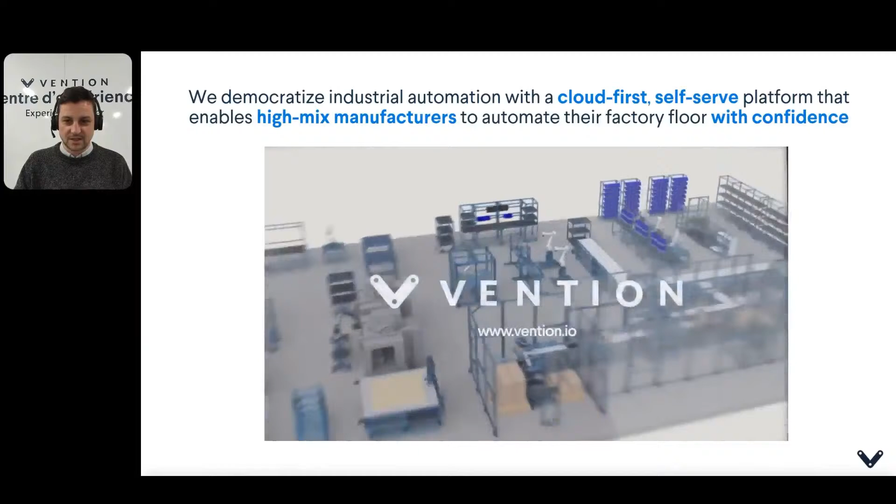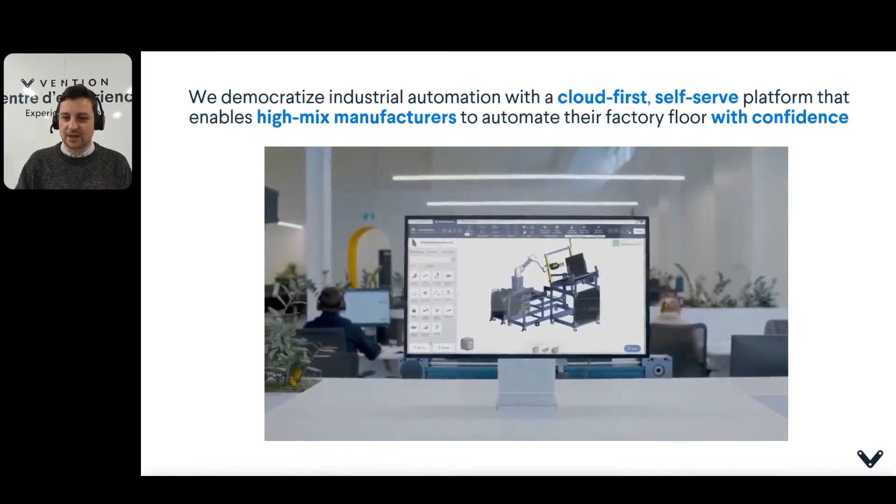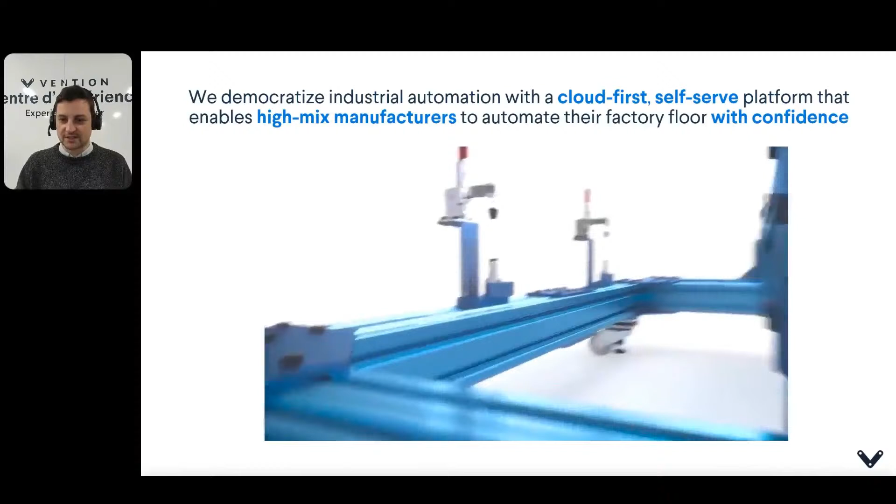First off, to introduce Vention and our goal, our mission here at Vention is to democratize industrial automation. To do so, we have built a self-serve platform for high-mix manufacturers. By self-serve, we mean that our users, such as manufacturing engineers and plant operators, can design, automate, order, and deploy by themselves in an autonomous fashion. This allows high-mix manufacturers to have more access to automation, as they historically could not easily afford to launch industrial automation projects as a result of their smaller production volume and high mix of parts.

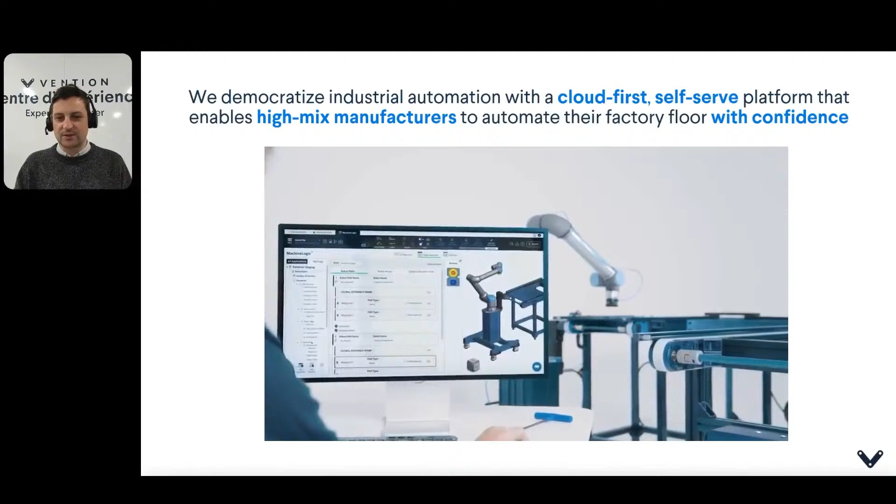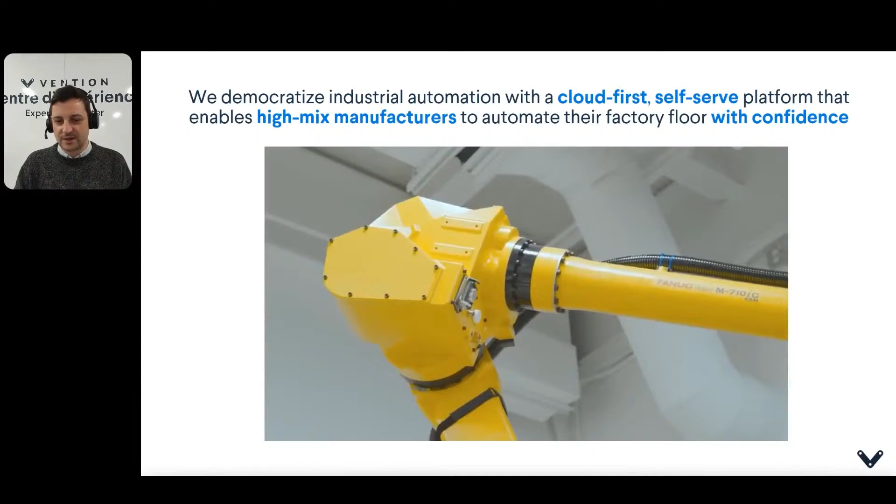One thing I like to emphasize here in our mission statement is 'with confidence.' Since Vention offers cloud-based design and automation tools, this means that users can self-design, self-program, and simulate fully in the cloud before they commit to an investment.

A few facts about Vention. We were founded in 2016 and are now 7 years old, nearing 8. We have 3 offices: one in Montreal, one in Berlin, and one in Boston. Our parts ship from 2 distribution centers, one in Montreal and one in Berlin. We're privileged to serve over 4,000 clients in North America and Europe that span over 25 different industries. Vention has thus far provided more than 16,000 machines in the field and delivers approximately over 200 robot arms per year, both collaborative and industrial.

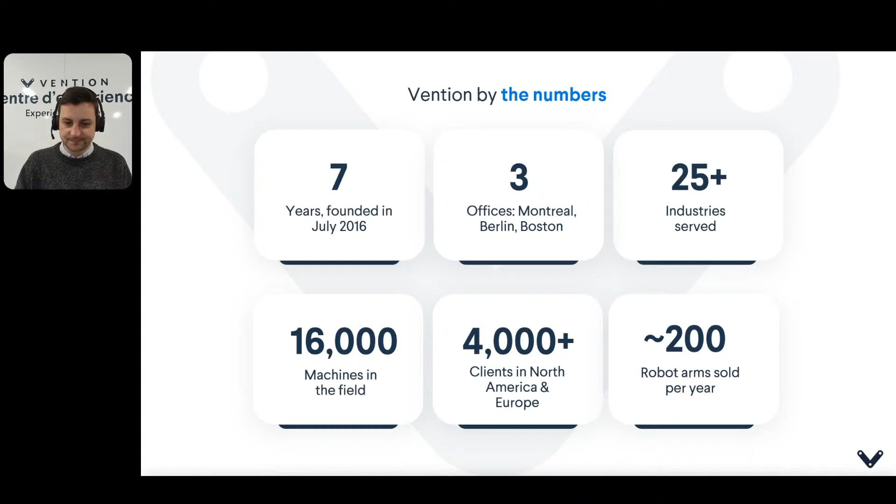With the introduction out of the way, now let's get started with an introduction to automation, but also how to get started.

First, a little background on automation in general. High volume manufacturing facilities, like those for cars and consumer electronics, have been automated for decades. However, the vast majority of manufacturing plants in North America, around 80%, are still operated by manual labor. And yet these manufacturers often face the same production cost pressures and labor shortages as their high volume counterparts. Industrial automation is often the best solution, although it can be a daunting one for new manufacturers or first-time automation practitioners. New adopters may find that deployment is costly, production delays are frequent, and it's hard to balance safety requirements with efficiencies. Nevertheless, the need for automation continues to grow, and manufacturers will not be able to avoid adoption for much longer if they wish to remain competitive in their segment.

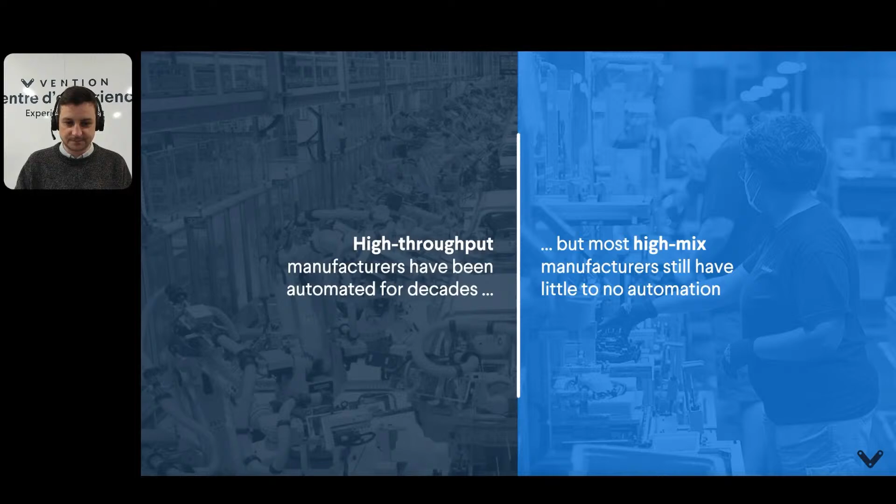So let's take the example of a $500,000 project. If you unpack that project, half the cost will be for the technology, usually coming from established manufacturers of industrial automation providers. The other half usually goes to the system integrators or the engineering work that is needed to design, program, and eventually deploy those systems.

What Vention does through a self-serve platform is eliminate the second half. You become the system integrator of your own automation solution. This shrinks the project cost and by default enables manufacturers to automate profitably and autonomously. With the technology provided by Vention, we end up in a world where folks that used to operate the manufacturing floor are becoming the folks that will now design and automate our manufacturing floor.

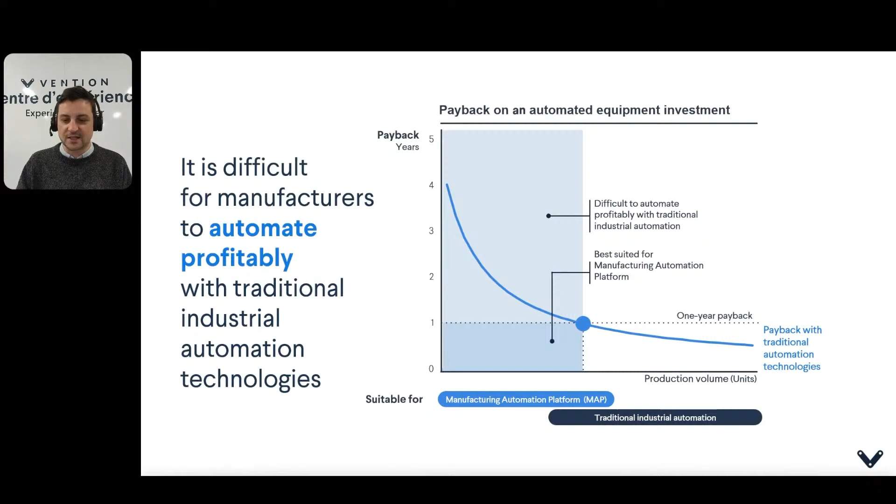Now you know the financial framework for evaluating automation projects, but how do you set yourself up for success? What process should you follow to ensure you're successful on your automation journey?

We've discussed the importance of ROI in the previous section, but there are other compelling reasons to move toward automation. In addition to labor cost savings, maybe you are facing labor shortage issues, or maybe you are looking to solve quality issues, or you have workers exposed to risky jobs, or what we categorize as dirty, dull, dangerous jobs.

So the first step to successfully automating is to establish a clear objective. Here are the top 4 reasons that we've seen customers wishing to automate.

First one is to realize cost saving. This usually means reducing labor and other recurring operation costs. Value creation will come from comparing existing recurring costs to the current operation, plus adding the project's non-recurring cost, and then comparing that with the reduced recurring cost realized once the automation project has been achieved.

Another reason may be to improve product or process quality. Savings here can be realized through defect and scrap reduction, or by reducing dependency on quality inspectors to inspect and validate the output of a manual process. As automation is repeatable, process can now be certified and inspection requirements can be relaxed. Automation also leads toward process optimization, reducing the quantity of consumables required to achieve the desired quality output.

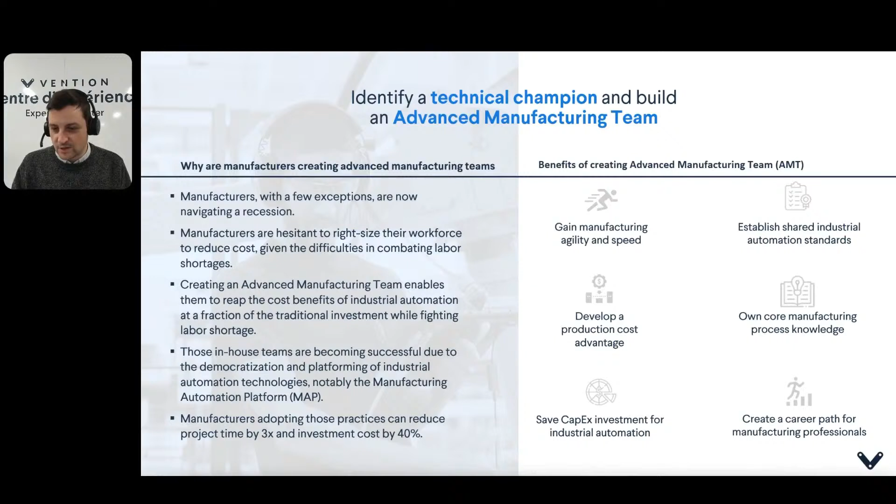The technical champion will share their deep technical knowledge within the advanced manufacturing team. They'll establish production guidelines with machine operators, establish maintenance schedules with maintenance personnel, encourage problem-solving tactics amongst all collaborators, and in the case of productized application, or if doing a turnkey project with Vention, they will also establish the requirements for the automated equipment by owning the completion of the FAT and SAT checklist. These acceptance tests are both essential documents to ensure a successful automation project in case of turnkey deployment.

The second step is to build the advanced manufacturing team. With your technical champion in place, it's time to build an advanced manufacturing team. Guided by the technical champion, this team is built to select and drive industrial automation initiatives for the company, regrouping expertise in process requirements, mechanical design, industrial control, and robotics.

This team develops deep process knowledge to deploy self-designed automated solutions in-house rather than relying on external engineering services firms to complete projects. An advanced manufacturing team is a new way for manufacturers to manage their end-to-end automation projects internally, rather than relying on multiple vendors, which typically increases the price of a project and extends the timeline.

The last step is to gain support from the top down. The technical champion must effectively pitch the project to the management to secure the necessary funding, resources, and access to the resources. Starting with a well-scoped project goes a long way when building expertise, ensuring project success, and increasing the chances of obtaining approval from management on future projects.

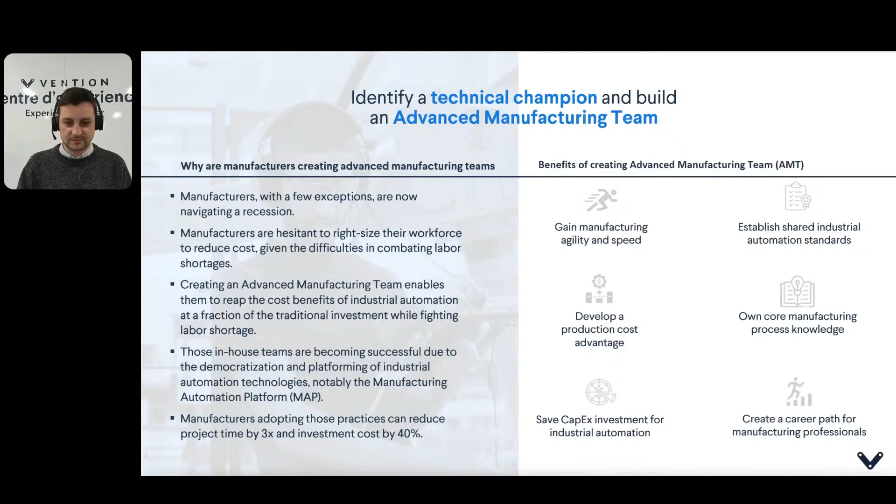With a clear goal in mind, you now face a new set of questions. Where should I begin? How? And with whom? Experts generally agree.

First-time automation practitioners should begin with a low-risk project and expand from there. Starting with a well-scoped project goes a long way when building your expertise and increasing your chance of success. With that in mind, make sure the ROI or payback is not the only thing you're measuring. You want to factor in building long-lasting expertise as well.

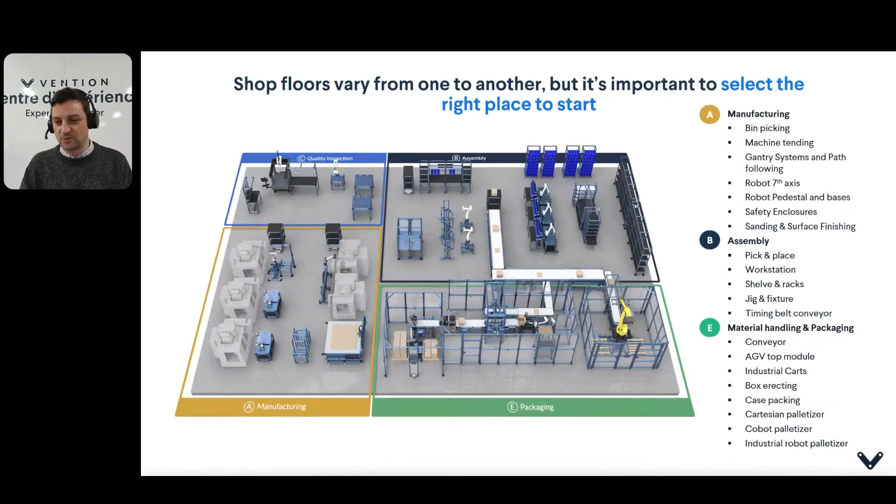That being said, selecting which process to automate consists of a balancing act of feasibility, risk management, and value stream optimization. Be mindful of automating bottleneck processes as much as possible. The last thing we want is to automate processes that result in an increased work-in-progress volume while maintaining the same total throughput as before.

Part of the process of selecting your first project includes evaluating the risks involved with adopting automation and how best to mitigate them and incorporate this information into your strategy. This can be largely broken down into two categories: technology and process risks.

Process risk is the ability for the chosen technology to repeatedly operate at desired performance when process input varies significantly from one unit to the next due to manufacturing tolerances and other sources of variability. Technology risk, on the other hand, can be interpreted as the level of uncertainty involved in the successful implementation of novel technologies in your manufacturing operations.

The TRL scale, or Technology Readiness Level scale, can inform on the maturity level of selected manufacturing technology, but one should also be mindful of the available skill set within their organization. This is where it can be relevant to discuss upskilling the current workforce.

So first, let's discuss process risks. Process risk relates to the operation, task, or process that one is looking to automate. It's owned by the end user of the solution that is being provided. Oftentimes, it can be largely underestimated by teams with the expectation that everything can be automated all at once.

Process risk management involves focusing on the process, or SKUs, part numbers, that constitute the majority of the production, and descoping edge cases from the first automation project. The 80-20 rule applies here. It's not uncommon that 20% of a production can result in 80% of the cost. Focus rather on automating 80% of the production instead of 100%, and there's good chances of decreasing the total cost and raising the efficiency of the automation solution that you choose.

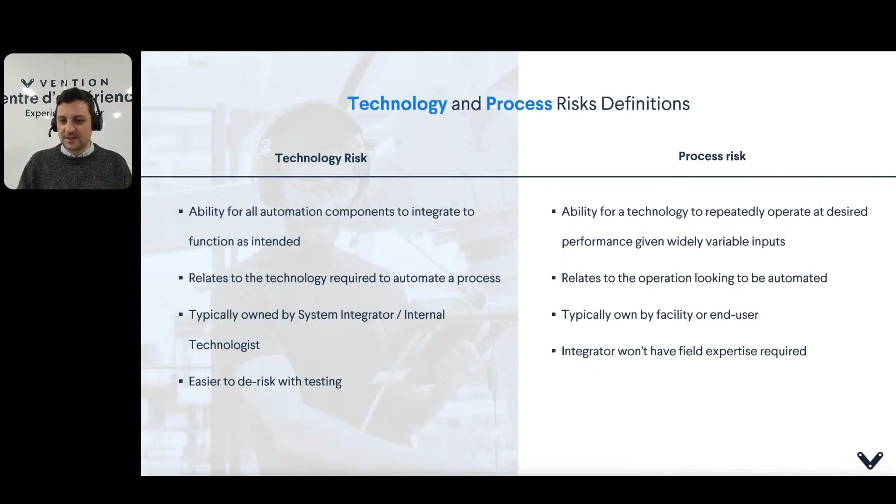Upskilling the organization's workforce can be key here. Ask yourself, do I have the capabilities to operate, troubleshoot, and maintain this type of technology autonomously, or will I require external support? High industry technology readiness does not directly translate to your organization. Set ambitious goals, but aim at raising the ceiling of your internal competencies.

So to discuss this in more detail, let's look at a robotic palletizer example to highlight what can be categorized as a process risk versus a technology risk. So the process risk is essentially managing variability induced in manufacturing cycles. The source of variability in the palletizing process can be the variability of box orientation as they're presented to the robot. This will require the solution to account for that variability of box orientation.

You may have different box sizes as well that could impact the gripper selection. Various weights of the boxes could also account for what robot or cobot you choose to automate, because the payload of the robot needs to be accounted for here. And different pallet layouts — how many process recipes do we want to support?

Technology risk is the question of, is the technology mature and is it within my organization's competencies to operate and maintain? So you can ask yourself the question, are cobots technologically mature? In this instance, yes, they are, but it can be argued that 3-axis gantries are even more robust.

So what would be the impact on process risk if we choose to go for a 3-axis gantry in relation to a robot? What are the integration requirements? What communication protocol do I use to synchronize all the processes — the conveyors, the robot, and other downstream or upstream processes? Will this equipment need to be integrated with other legacy equipment?

So do I understand how I will integrate my robot with other equipment that may already be present on my factory floor? Will I be able to operate, troubleshoot, and maintain this machine? If not, do I need to hire, upskill my workforce, or do I need to delegate some of those operations to external contributors?

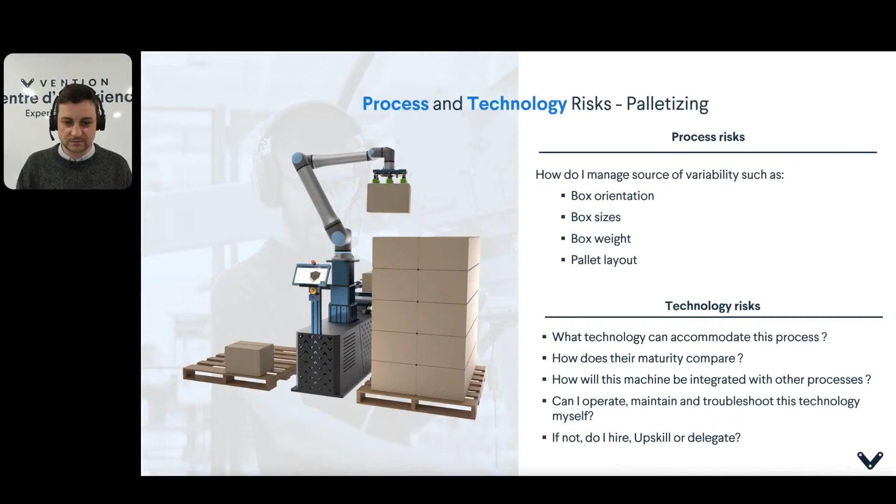As an industry, we have made significant progress in extending the process risk frontier, with breakthroughs such as mission-based programming, digital twin, tactile feedback, and synthetic training. There's a vast array of things that are possible to automate today.

Vention aims at empowering manufacturers to take control of their automation journey by helping them push the technology risk frontier. So building the design-to-deploy workflow as the centerpiece of Vention's self-serve platform, along with the productization of key robotic applications and the plug-and-play nature of all our automation hardware, all play a significant role in reducing the technology risk. Also, as manufacturers scale their automation experience and competencies, they will find that they are gradually empowered to take on more ambitious projects that have more process risk and technology risk associated with them.

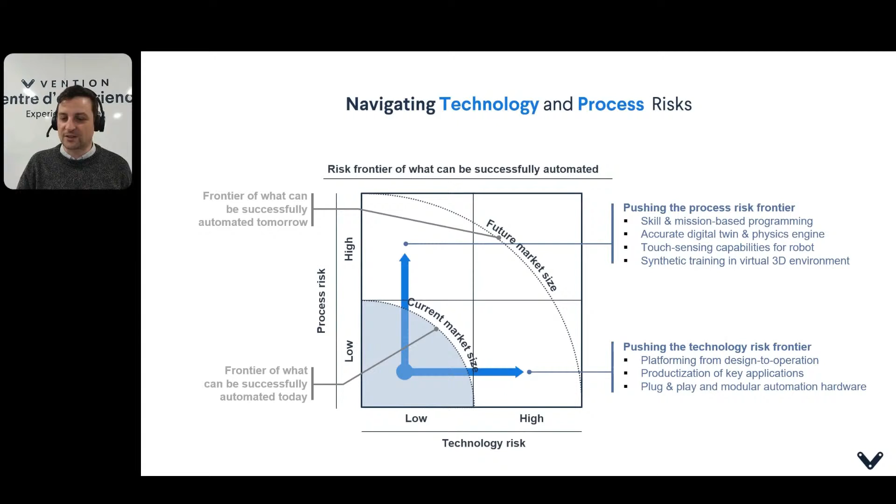This brings us full circle to Vention and our manufacturing automation platform. As said earlier, the mission of Vention is to democratize industrial automation with a self-serve platform for high-mix manufacturers.

Traditionally, industrial automation technologies are project-based, meaning manufacturers will hire an outside third party to complete the automation project from start to finish. The typical steps for project automation are depicted below.

The entire process can last months or even years and involves different experts, each possessing unique process knowledge. When issues inevitably arise, the manufacturer must call back the expert who holds that process knowledge, hoping this person has not left the company.

In product automation, the automated application or the entire manufacturing floor is created using all the same hardware component and software environment. This approach allows for easy modification and upgrade as the manufacturing floor expands or changes. This Lego-like modular plug-and-play approach ensures flexibility.

The other benefit of product automation is the comprehensive support provided. With hardware and software under a single vendor, you can access a customer success team that knows the ins and outs of the product. This team will work alongside you to troubleshoot your issues and provide resolutions, so when a similar problem arises again, you know you have the knowledge to fix it.

Speed is crucial here, and having a team of experts a phone call away rather than a drive or a flight away is invaluable to keeping your production output.

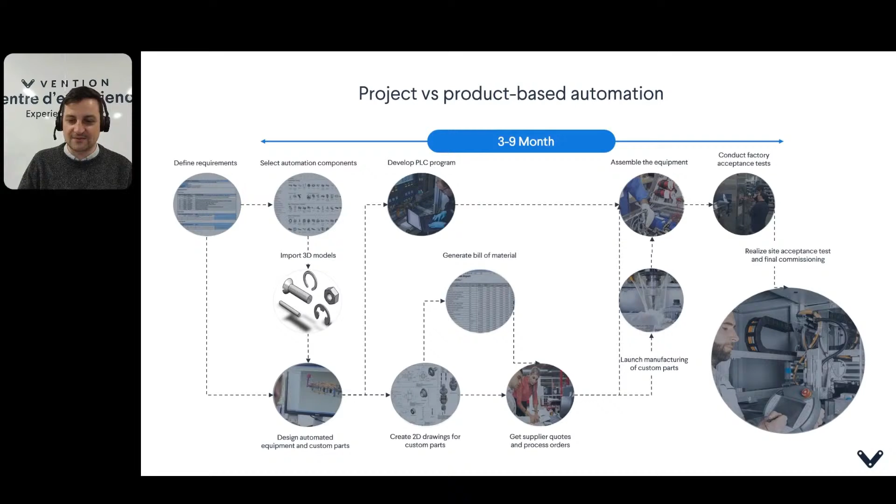So we define ourselves as MAP, the Manufacturing Automation Platform. We're based on 5 pillars, each representing a step in the automation journey. We start with design. Our users arrive on our website and fall into a software that we call Machine Builder,

where they can design with industrial Lego bricks. In that environment, we have all the geometric data and metadata of all those Lego parts: prices, weight, description. Equipped with that data set, we can do a beautiful amount of software automation that would never be possible in a traditional CAD software.

We give our users real-time pricing, assembly time, bill of material, and automatic fastener management. We can recommend the next best part for their design, fetching from a library of over 200,000 designs that our team of clients have created before.

When we bring one part to the next, we can predict how the user is trying to connect those two parts together. This whole infrastructure that we've built, leveraging the geometric and metadata, just makes the act of design significantly faster and easier. When we're done designing and we have this working prototype, it's time to automate through machine logic.

This is the automate pillar. Machine logic is our automation programming software. Within machine logic, users can program their machine either in a visual sequence editor or using a Python API.

They can also create their operator HMI and simulate the entire cycle, all from their web browser. They can simulate not only traditional automation, conveyors, pneumatics, actuators, but also robot arms. If they like what they see, they can move on and order the machine from the website.

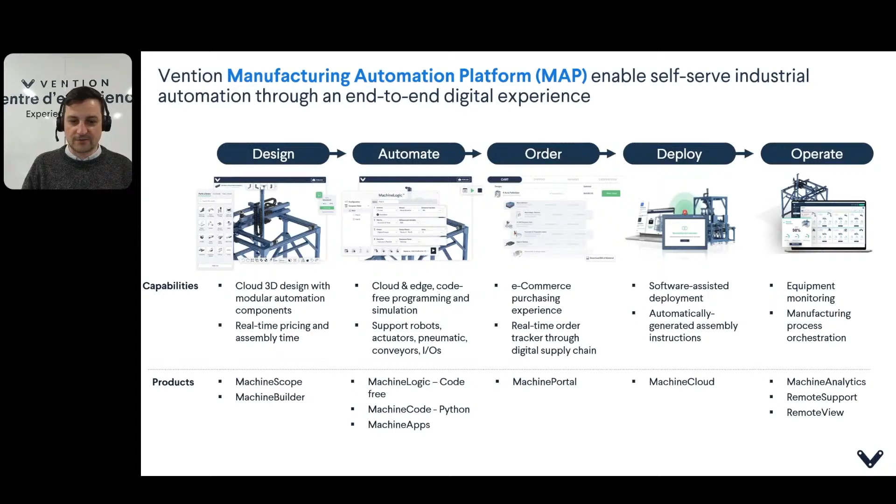So if you think about all the digital integration and software products we've built with MAP, we've significantly shrunk the time it takes from ideation to deliver an automation solution. We're talking about a couple days or a couple of weeks at max. We're not talking in months.

If you look at where the value is created, the cost saving through digital integration will really come from the engineering tasks. So integration, act of design, act of programming, act of deploying, all those manual tasks will take significantly less time. On average, we see our users deploying 5 times faster using the Vention platform than going the traditional way, which translates to roughly 40% off the cost of traditional automation.

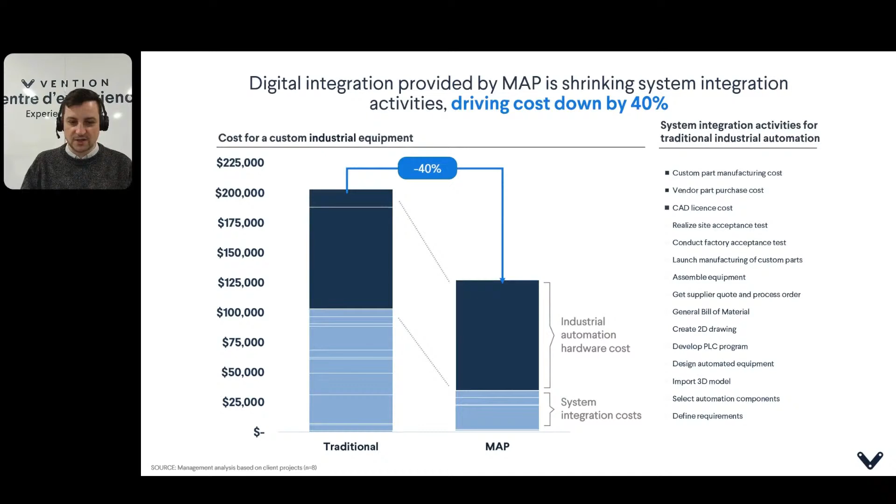6 critical sources of value arise when you embrace product-based automation. Some of those values are listed below. Fast ROI: productized application and self-deployment eliminate non-recurring engineering costs and accelerate return on investment.

Intuitive interfaces: simple user interfaces enable simple training and program updates without any external assistance. Modular and scalable: platform modularity allows for high customization and easy application upgrades as the factory changes and the manufacturing floor evolves. Field proven: productized applications built on hardware and software that have been deployed tens of thousands of times.

Dependable: quick access to automation expertise with a dedicated customer service team and on-demand remote support. And future-proof: with 100+ engineers continuously developing the hardware and software platform, applications are supported over the long term, facilitating maintenance and upgrades.

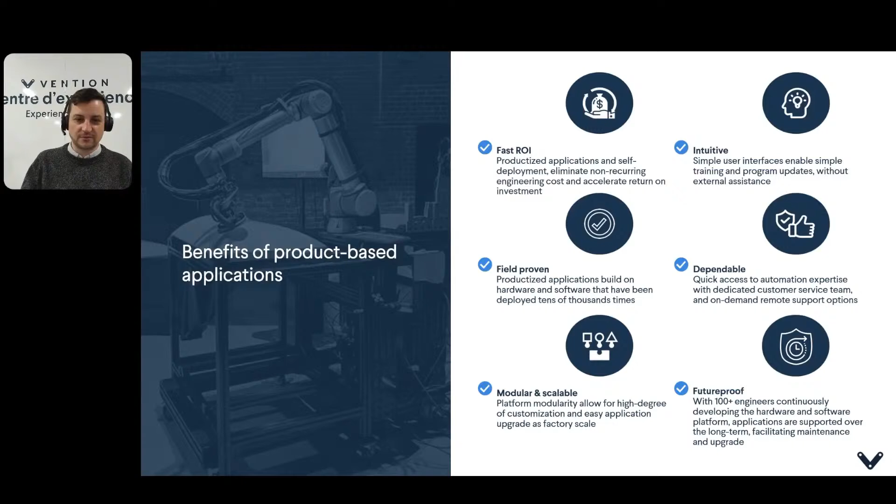So I'd love to end this webinar with a few success stories of customers navigating the risks shared earlier by going with a product-based automation solution.

So first, we have Spectre & Co. They were looking to remove repetitive and dull tasks from their manufacturing floor so employees could be reallocated to more fulfilling tasks. They also wanted to improve production by introducing more efficient processes. Spectre & Co. knew automation was the solution to their problems, but with no prior automation experience, they weren't exactly sure where to begin.

To fill that knowledge gap, Vention accompanied them along the way to manage both technology and process risk. By adopting an automated solution to a previously 100% manual task, they were able to avoid critical downtimes, increase production, and reallocate workers to more important tasks. By going for a product-based automation solution, they ensured that any modification required in the future could be done very easily on their own.

I'd like to mention here the statement from Linton, the research and development manager at Spectre & Co., who said that Vention really made it simple for them to get into their first robotic project. Their involvement and guidance helped implement this new project at the facility, which is a true statement of the value brought by our platform.